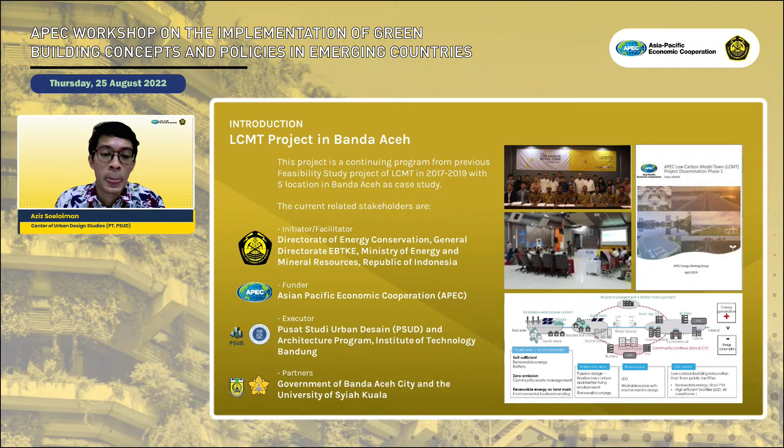As you can see in the slide, this project involves several stakeholders, such as the Ministry of Energy and Mineral Resources of Republik Indonesia, as the initiator, facilitator, and supervisor of this project. There is also APEC as the funder and inspiration in initiating this project. Then there is Pusat Studi Urban Desain, or PSUD, and ITB as the executor, researcher, contractor, or implementer of this project. And last but not least, the local partners of this project from the government of Banda Aceh City and the University of Syiah Kuala. We can move to the next slide.

Currently we are in the middle of doing the building measurement and building simulation, with the main workshop as the main activity of this project. Our final goal is to publish the final report, which will consist of some recommendations based on the studies and discussions that will be held in this workshop today.

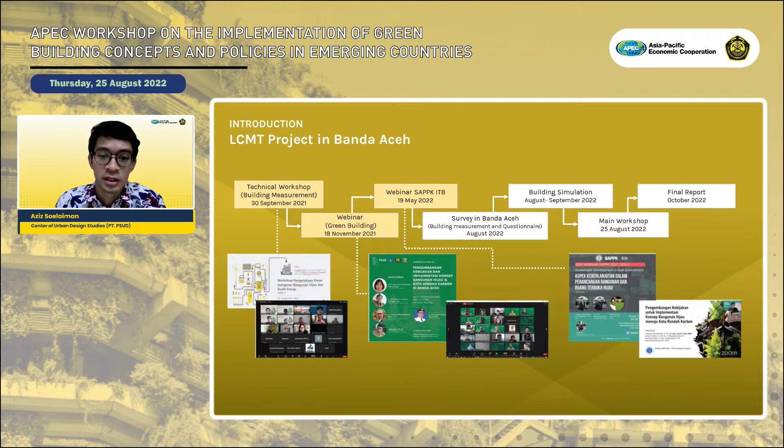To gain more understanding on the readiness of Banda Aceh City in implementing the green building concept, three aspects have been identified. The first is policy development through webinar and online discussion on the perception of the green building concept. Second is building management and occupants' behavior through survey and questionnaire of the building management. The last is energy consumption through building measurement and building simulation.

For the first step, we identify policy development readiness through a webinar and online discussion held last year, titled Policy Development for Green Building Concept Implementation Towards Low Carbon City.

Based on the webinar and discussion, several key points were taken from speakers representing academic, practitioner, professional, and government perspectives on how to create or develop policies to implement the green building concept. Overall, some data and references presented in this event can be used as our initial study and as a recommendation basis for developing policy and standards related to green building, particularly in Banda Aceh.

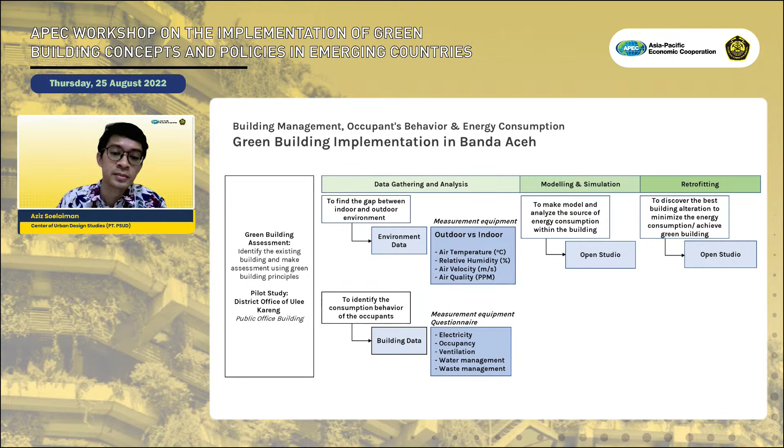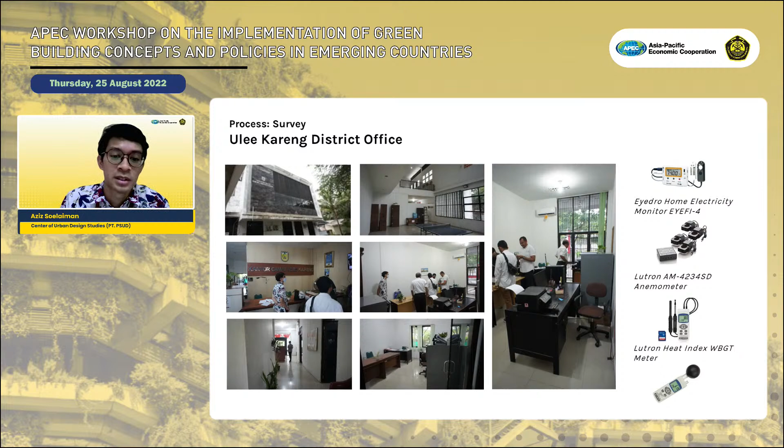For the results of the measurement, here are some results regarding building management based on the questionnaire. We asked about building occupancy, electricity usage, energy consumption from the lights, and there will also be consumption data from the air conditioner.

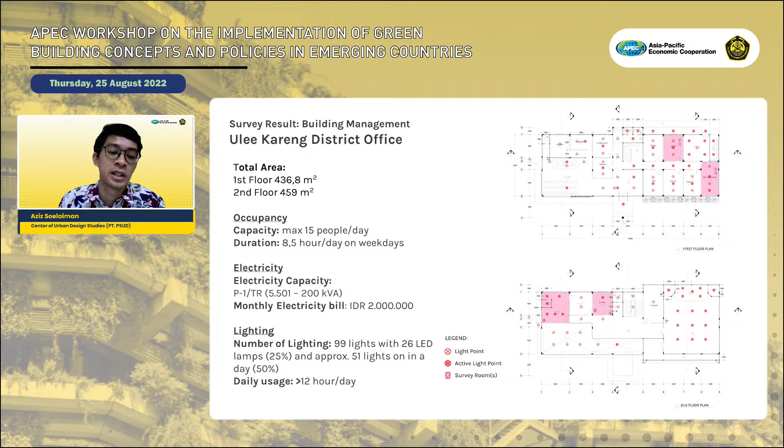What we want to highlight is the first one: there are at least 2 lamps in each room used all day during working hours, so even in daytime they still use lamps, and not all of them are LED lights. It means that although the weather is sunny, building users still need indoor or artificial lighting to work inside the building.

Moreover, air conditioning is installed and used in every workspace and every room during working hours, including break time. All of the toilets or restrooms use a bathtub or water container; while they have dual flush toilets, these don't work, so they have to use water from the container.

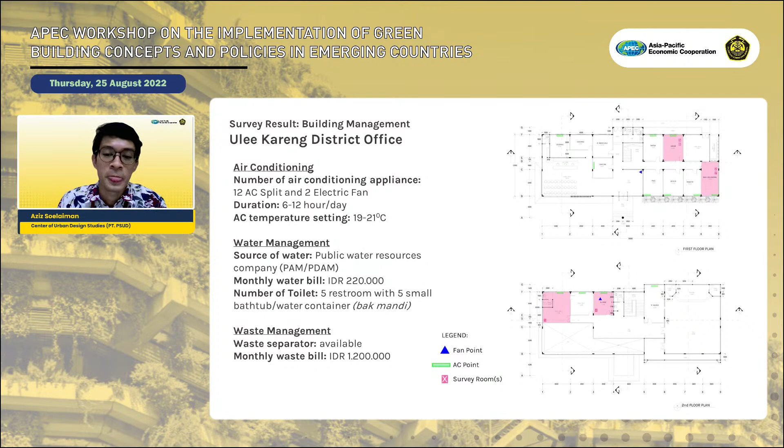Meanwhile, for waste management, this building already has a waste separation system, which I think is a positive green building effort.

So we can say that there is probably an issue in air ventilation and also natural lighting, or the building design, which can actually contribute more to energy efficiency.

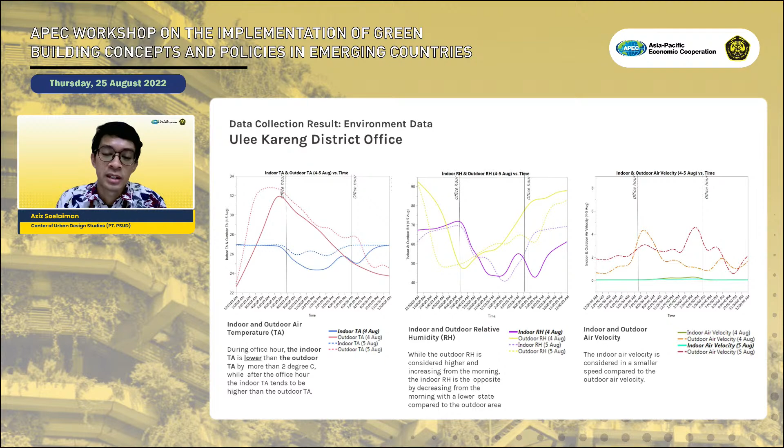To the next slide, as a result of the first measurement, the hypothesis from the ongoing survey can be summarized into three key points. First, the building is equipped with LED lights and conducts waste separation, which can be advantageous. Second, the dominant expenses from the building come from electricity and waste bills. Third, the majority of rooms use air conditioning, resulting in cooler indoor temperature, smaller relative humidity, and less cross ventilation.

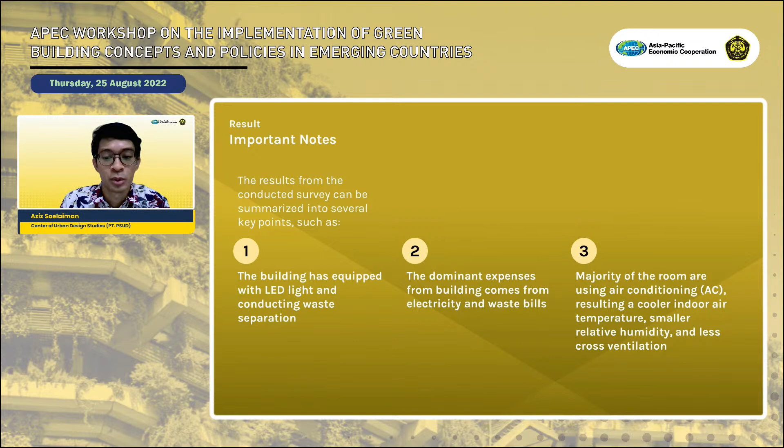That's the hypothesis for this survey. Next, the last aspect we identify is the energy consumption based on direct measurement during the survey and also from the simulation conducted recently. But due to time constraints and limitations, I will explain this section briefly.

First, we measured the energy consumption using the Hijau Home device as the basis for comparison with the simulation result. As we can see, the total energy consumption in a day is about 484 watt-hours.

And if we divide it into the two floors in the building, it is relatively the same, about 240 watt-hours.

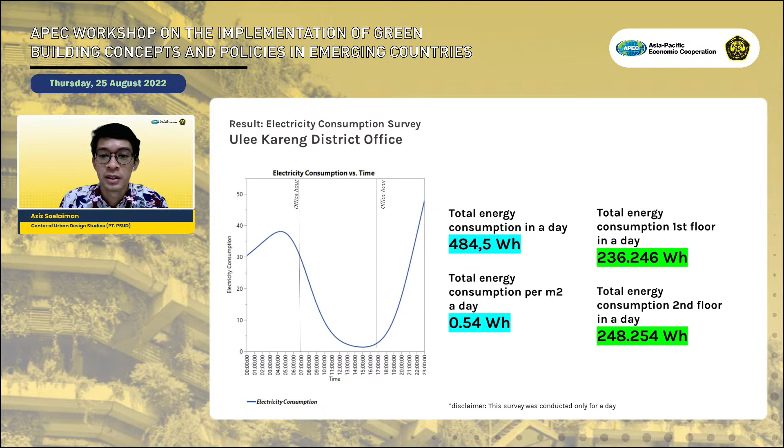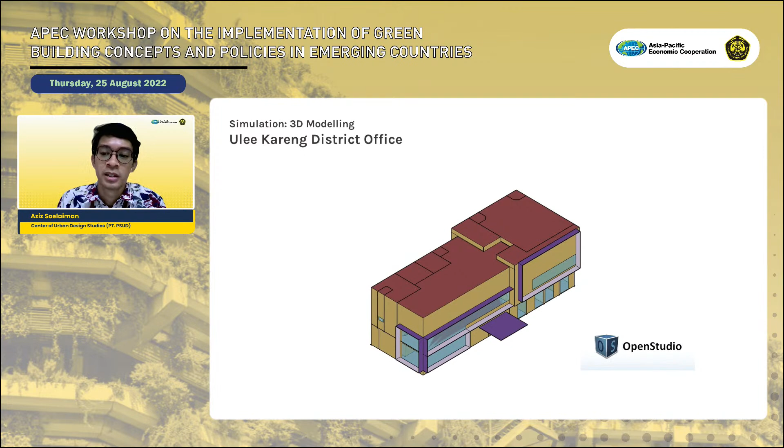Next slide please. We tried to do the simulation for the public office building using OpenStudio to calculate the energy consumption within a year. So this is the illustration of the 3D modeling.

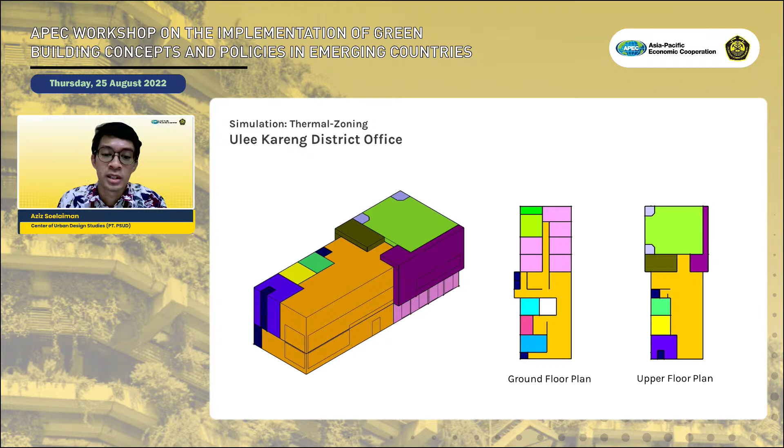Next is the illustration of the thermal zone configuration based on field survey in the existing building. The color represents the function and the air condition of each room in the building.

So for the next slide is the result of the simulation. Based on the simulation results, we can see that the annual energy usage of the building dominantly comes from the interior lighting and interior equipment, for more than 80% of the total usage, then followed by the air conditioning and electric fan for about 20%.

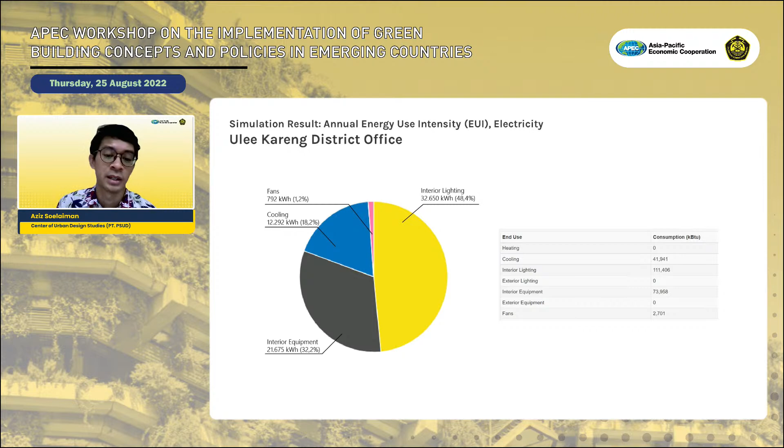Okay, to the next slide. This is the energy consumption per month. We identified the trend for each month.

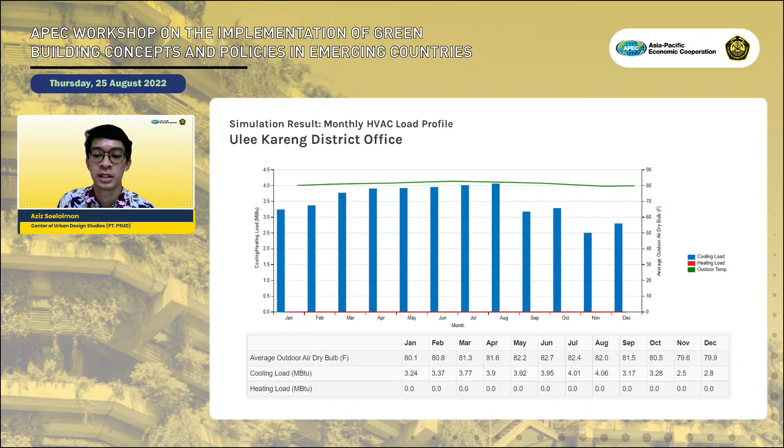Compared to the monthly HVAC load profile from the simulation, the cooling load is increasing in the summer, peaking in August, and then starting to decrease after that.

So the result from the conducted survey and simulation in the meantime can be summarized into several points. The first one, the energy consumption is considered higher after office hours, probably due to the lights or lamps that are turned on after working hours.

Second, most of the consumed energy comes from the indoor lighting and indoor equipment. Third, the annual and monthly simulated electricity consumption is considered high. And the last one, about retrofitting, we can say that retrofitting is necessary to find the most efficient energy consumption and to minimize the alteration.

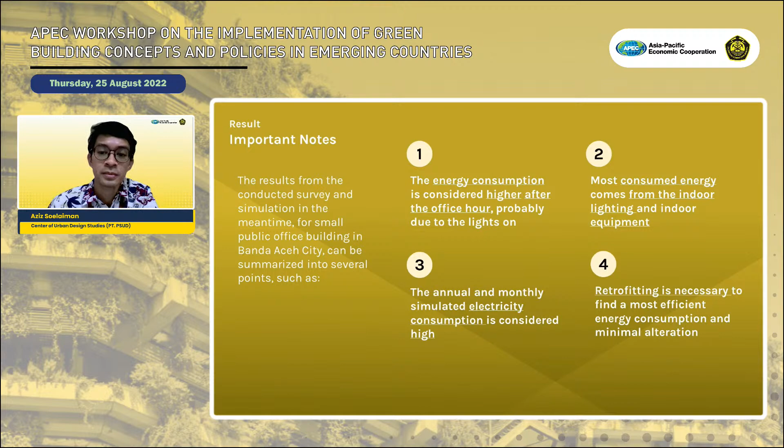Okay, to end this introductory session, I would like to highlight some conclusions. Based on the identification of the three aspects, the overall results can be concluded as follows. First, the regulation and strategy plan concerning green building implementation on a national scale is already available, based on the previous webinar. So the next step is to find a formulation of more contextual policies on a local scale, for example in Banda Aceh City, this case study.

Then the second one, about building management and occupant behavior. Although the high energy consumption is still dominantly caused by lighting and HVAC, there is an opportunity to move towards green building management, but we think that more encouragement through government programs is highly recommended to bring policymakers to implement it.

And the last point is about the electricity consumption, which is still considered high and hasn't met the green building requirement. Therefore, building alteration through retrofitting is still necessary and will be done in further steps.

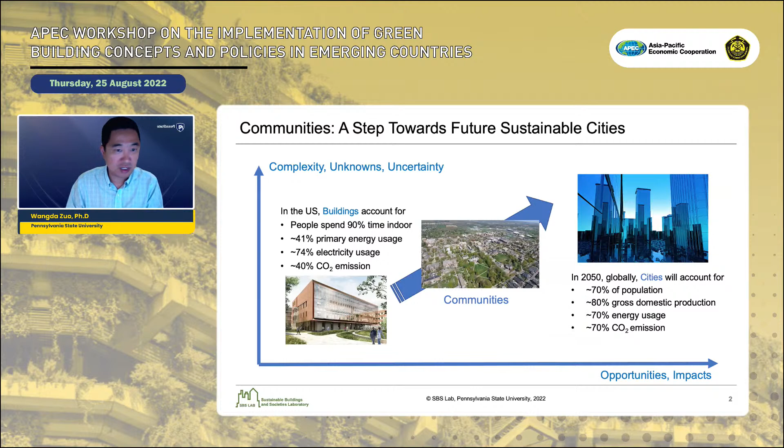So by definition, what's a zero energy community? This is given by the United States Department of Energy. It says that the zero energy community is an energy efficient community. We look at it on a source energy basis, meaning the generation from power plant energy used. The actual annual delivered energy is less than or equal to the on-site renewable exported energy. If you change 'community' to 'building', then you get the definition for zero energy buildings. You can find this definition on the DOE website.

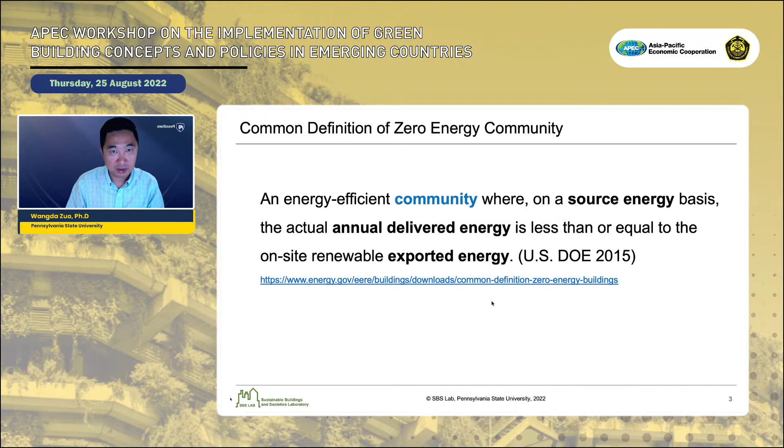In our work, we found a real-world zero energy community in Florida. This map is of the U.S. Florida is on the southeast corner. This is the Gulf of Mexico, and as you can see, the island is called Anna Maria Island. The community is called Historic Green Village, as shown in this picture.

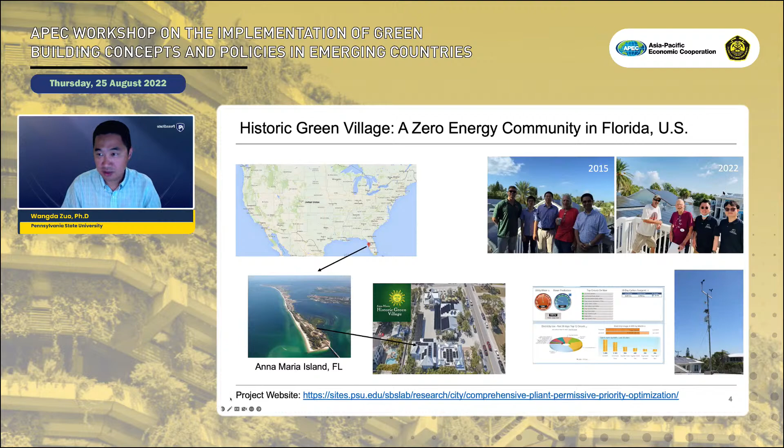They have 5 commercial and residential buildings mixed, and those buildings together form a community energy system. They installed meters to measure all the data, and my team also installed a local weather station and solar irradiation sensor to measure weather conditions. This picture shows the community was built in 2012, and my team started working with them in 2015. Recently, we worked with the community again.

This figure shows the net energy usage and production of this zero energy community. If you see the center zero, the blue color indicates the community produces more electricity than it needs, therefore it exports energy to the power grid. The salmon pink color indicates the community needs more energy than it can produce, therefore it imports energy from the power grid.

In the real world, you can see the imports and exports changing dynamically, depending on solar availability and also on the usage of energy in the community. This is a live community, so things are happening over time.

For example, in 2012, when they added more PV on the parking lot, they significantly boosted production. But later, a bakery moved into this community and used a lot of energy, so it became a net energy importer. Then they added more PVs, produced more energy, and another building moved in. So you can see things are changing over time.

When you have a zero energy community, you need to connect it to the power grid, because when the sun isn't there, you can use the power grid as your virtual battery. Then the utility charges the community in 2 terms: one is the actual electricity used, in kWh; the other is the max power that the utility has to provide to support the community. For example, you can see the pink line here, because that's the backup capacity needed. We call it the capacity charge.

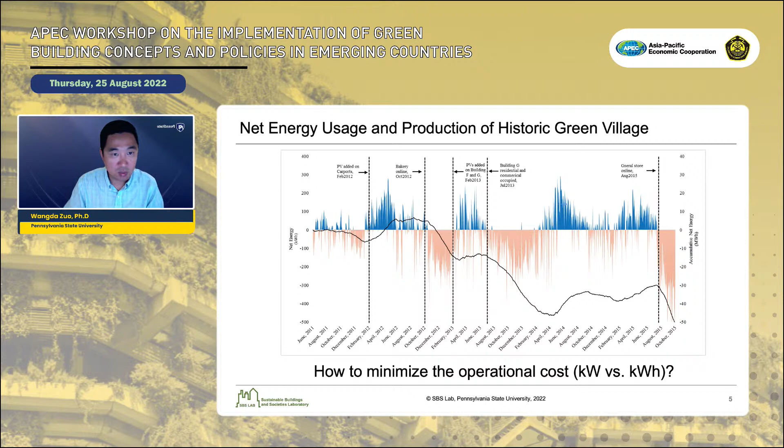To help them understand these questions, and to support the future design or retrofit of their energy community, we started a project supported by the U.S. National Science Foundation, trying to do the planning for smart, sustainable, and connected communities. This is joint research with Virginia Tech, and my team's role in these projects is to create the virtual testbed for their energy community.

So the left figure shows the actual schematic of this community. As you can see, all the buildings are connected through ground coupled heat pump systems. They use the groundwater as a source for heating and cooling.

Of course, for Florida, which is a typical tropical climate like Indonesia, the most need is cooling. Those heat pumps provide cooling for the buildings, but they also provide cooling for the refrigeration box, like refrigerators. And then they also have PV, which forms systems and connects to the power grids. In addition, they also have the solar water heater to provide hot water, and they have electric heater as a backup.

So the right figure shows the top level model we built for their energy community. As you can see, we have the PV, we have power grids, we also have heat pump connections. All these models are open source released and on our lab website. We build these models using a language called Modelica, which is an equation-based object-oriented language.

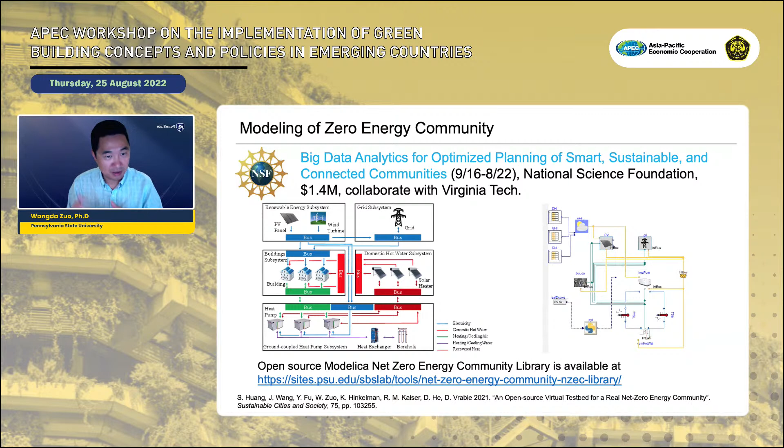Let me give you more introduction about the system we built, using the PV subsystem as an example. Here we use a hierarchy approach. If you open the PV icon, you will see there are 8 different PV subsystems located on different buildings' roofs. If you open one, now you can see the individual PV subsystems. This is vectorized, meaning a subsystem can have 10, 20, 30 PV panels.

And if you open that, you can define the individual panel and calculate the electricity generation based on the solar radiation. Then you're able to calibrate your individual panel based on its production. After that, you package it to form your subsystem, calibrate the subsystem, package it, and at the end you have a calibrated PV system.

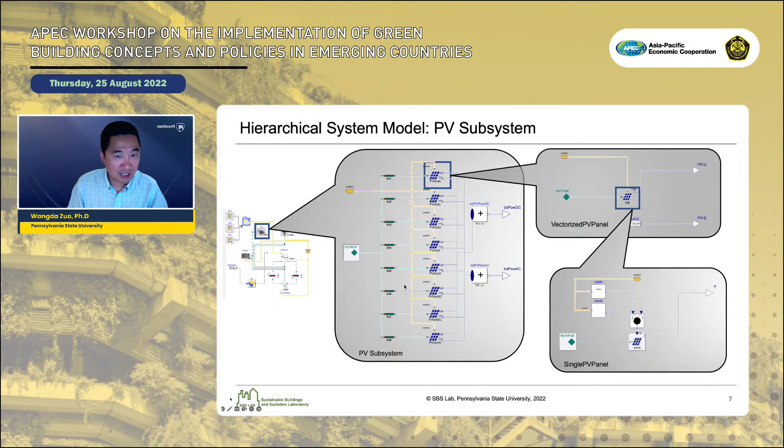We also validate our model. As you can see here, we compared our predicted energy production by the PV with the measured data. So we have the physical model, and we also developed an artificial neural network model, the purpose of which is to speed up the simulation. For both models, our prediction aligns quite well with the measured data.

But we do have some discrepancy, as you can see here. Our model sometimes over-predicts the energy generation, or sometimes under-predicts. So then we tried to study what's going on.

It turns out initially we used the solar radiation data from a nearby weather station. If you've been to Indonesia, on the island, the cloud is moving, which seems similar to Florida. So when the cloud moves over your community, you don't get solar radiation, and that results in significantly different output than the weather station predicts if there's no cloud.

So to get a more accurate weather prediction, we installed our own weather station at the community, so that now the results really match the measured data. Then we did the same thing for all the other systems, like the heat pump and all the buildings. Then we can have a validated virtual testbed, or sometimes you can call it a digital twin, of a zero energy community.

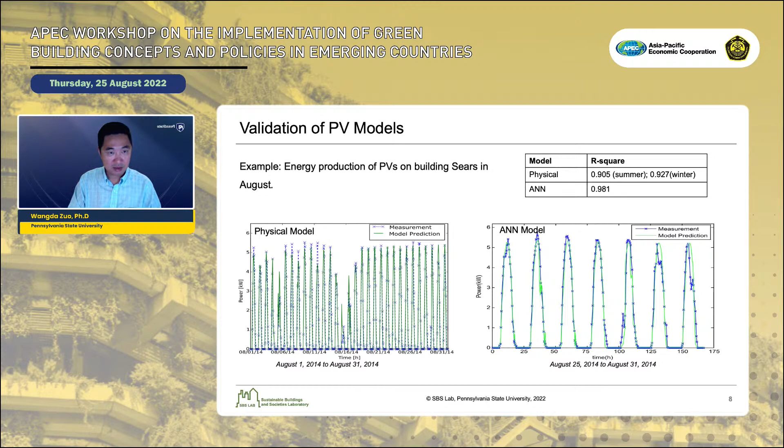So if you want to know more information about this project, you can find it on our lab website. We are thinking about, since the US is a developed country, can we really apply some of what we call smart community technology to developing countries?

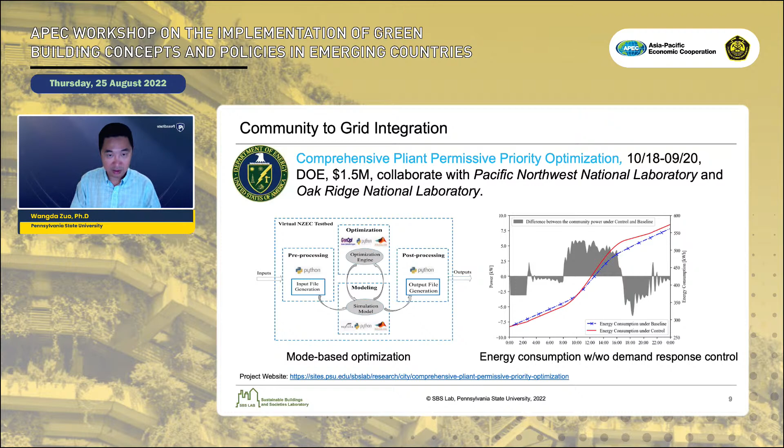I definitely recommend you to visit the garden alley, it's very beautiful. So in our project, we also learned from the city.

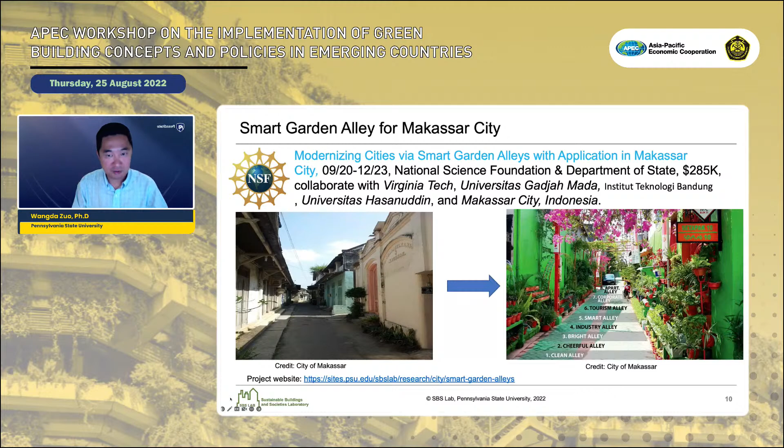The city believes the city is just like a human being. The garden alley is trying to improve the living environment of the citizens, just like creating healthy cells for the human being.

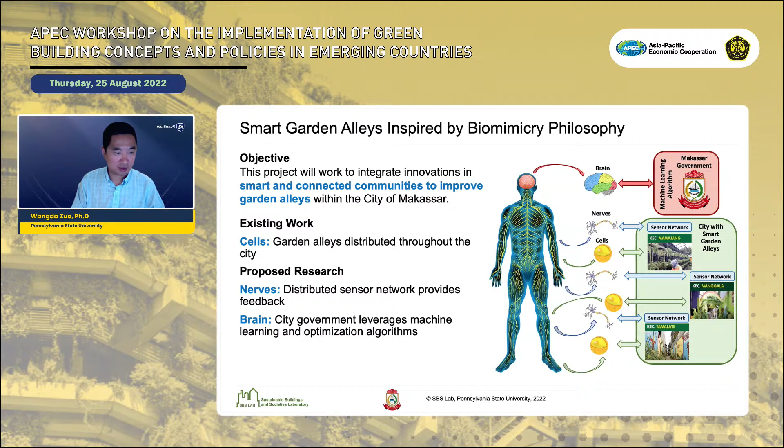So what we propose to do is add sensor networks to measure environmental data and quantify the quality of those garden alleys, just like adding nerves. Then we use machine learning to process the data we collected so that we can provide information for the city government to make informed decisions, just like adding a brain to the human being.

So far, working with our colleagues in Indonesia, we have developed a sensor network which can collect different environmental data. You can see PM2.5, PM10, SO2, and etc.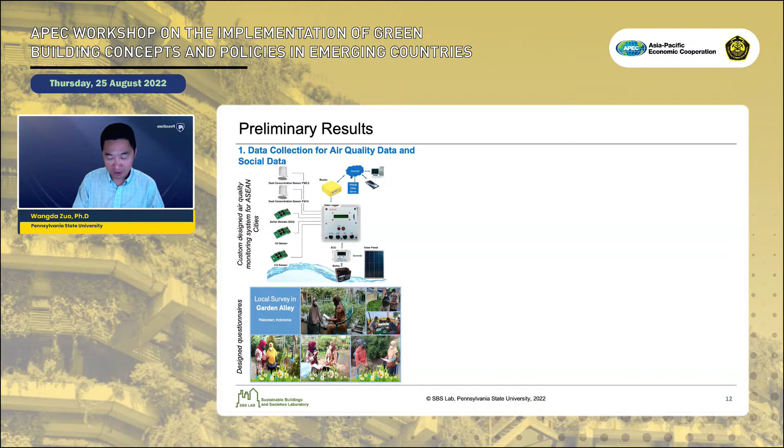Our Indonesian colleagues also conducted a survey with the residents and the management team of the alleys, trying to understand the operation of the alley and the needs of the local residents. Then we use that information as input to develop a machine learning model.

The idea is to understand the relationship between inputs like solar radiation, irrigation frequency, fertilizer, precipitation, etc., and the output, which is growth of edible plants and growth of inedible plants. So in this case, we used a recurrent neural network to try to figure out the complex relationship between the inputs and outputs.

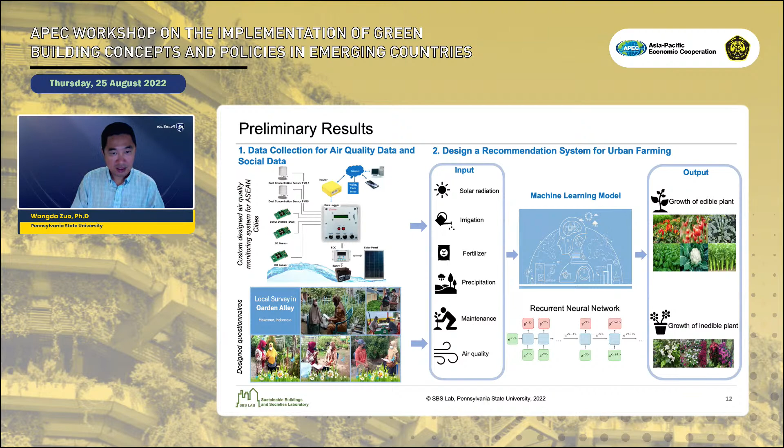Last month, we organized a joint workshop in Washington, D.C. The mayor with his team came to the U.S. and we had an event to exchange research findings. We also visited the Green Alley in Washington, D.C.

As a short conclusion, so far there have been many advances in green community infrastructure for energy, environment, water, and so on. In my talk, I only gave two examples: one is energy, the other is environment.

I think the future is really the integration of different green infrastructures for a holistic solution. As we know, sustainability and resilience are global challenges which need a global solution. At Penn State, we are working with the United Nations to form this global building network, trying to promote high-performance buildings globally. We welcome more partners, like from APEC countries, to join our network.

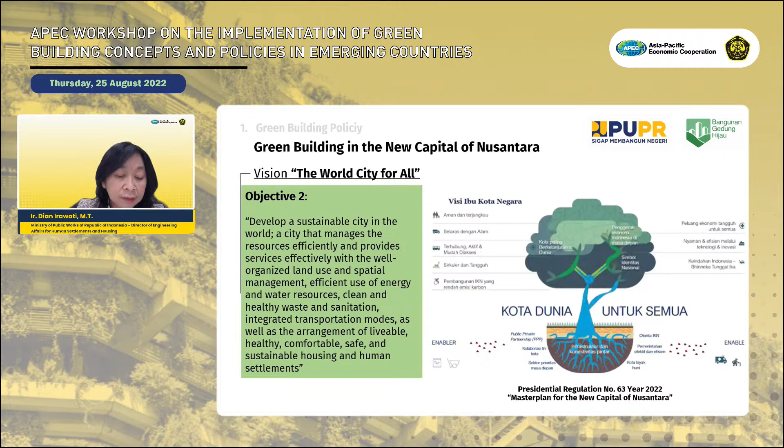What is the relationship between green building and the development of the new capital city of Nusantara? The principles of development in the new capital of Nusantara support the principle of green building itself, such as energy efficiency, procurement of green space, low emission development, and others. Of the 8 principles of the new capital city of Nusantara, 7 of them are closely related to the green building principles.

If we take a look at the KPIs, the green building concept is closely related to one of the KPIs of Nusantara, which is KPI Nusantara 4: low carbon emission development. In the new capital, it is targeted that 60% of energy saving is achieved by energy conservation in the buildings. This means the implementation of green building plays an important role in the development of the new buildings in Nusantara.

The government, through the Ministry of Public Works and Housing, mandates all newly constructed buildings in Nusantara must meet the green building requirements. It is imperative for all service providers for Nusantara, including consultants and building contractors, to understand and implement the green building requirements.